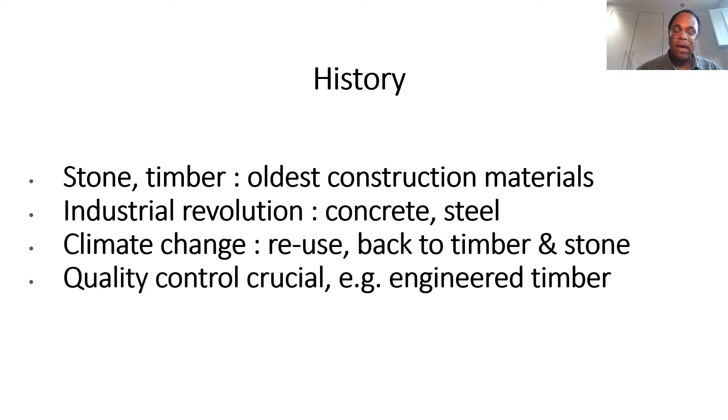Before I launch into the low carbon agenda itself, can I just say that, of course, structural engineers have a dual role in the fight against climate change.

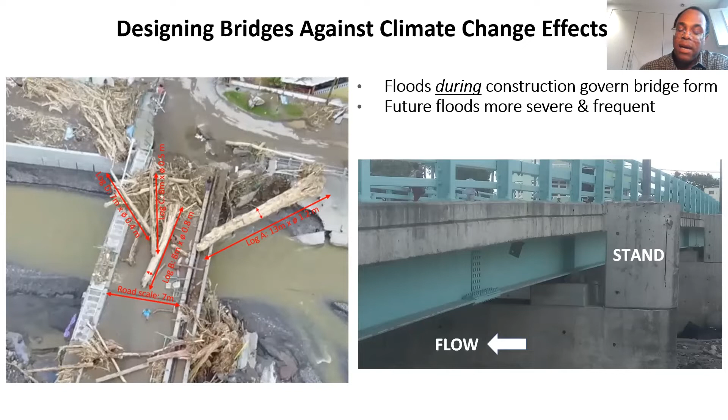The other thing we are finding is that it's not just the in-service stage which can determine what type of structure we use. Because the floods can often come during construction, anything like the use of props on the riverbed to support the weight of wet concrete during construction can be an unwise idea. So effectively using steel beams that are clear of the riverbed to support the weight of the wet concrete can actually be quite important. And therefore construction stage considerations with climate change involved can be governing the designs that you come up with.

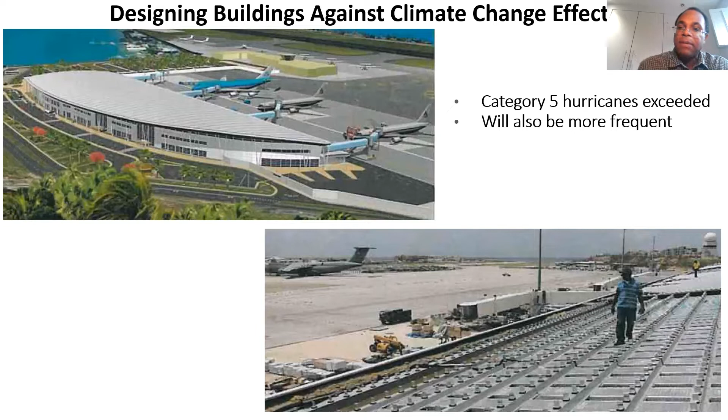Here is another example of something we've been looking at, which is basically airport roofs. This time we're not talking about floods, we're talking about hurricanes. And indeed the hurricane wind speeds and pressures are exceeding the category 5s which have been designed in the codes of practice. And so new forms of roofing, not just the cladding, but also the fastening of the cladding to the structure below, become quite important. And the definition of the tests that you need to make sure that the system of the cladding and the fasteners behave properly in hurricane winds. So representing the hurricane wind force effects very well in the test is an issue that becomes quite important.

Okay, so in terms of a decarbonizing strategy, the obvious thing is to go for low carbon materials. Quite often though, in many floor systems, walls, buildings, and so on, the most effective and most efficient structures tend to rely on combinations of the different materials. So you might find that quite often you're using a new low carbon material with an existing material, for example low carbon concrete with an existing steel. And because you're connecting the different materials, the connections themselves become as important as the components made out of the materials themselves.

As structural engineers, we have to make sure we understand not just the immediate, short-term response to load, but also the long-term behavior. What happens when, under its own self-weight, something's been sitting there for a while, you've got a lot of moisture, you've got a lot of change in temperature. Those are the sorts of things we need to be looking at. And bearing in mind that the construction industry is standards driven, we need to make sure that our understanding translates into design guidance.

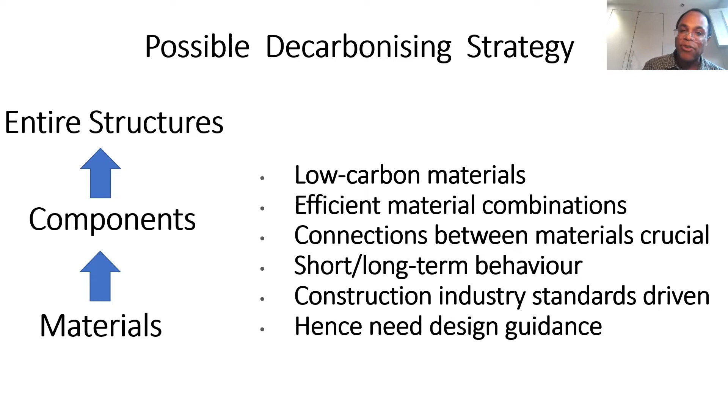So on the left side, I've deliberately put this image there because there's a multi-level, multi-stage process that we have to go through. We need to understand the materials. Then we need to understand the components made out of the materials. And then we need to understand the entire structures themselves. And to that end, an example of a project that we've been working on, which has been led by Mace and which is funded by Innovate UK, can be seen here in two key images.

On the left, you can see very clearly a two-story full-scale mock-up, which has been built by Mace at Brandon, about 2 hours drive north of London. In essence, what we've got here are these cassettes, these modules, which are 9 meters long, almost 3 meters wide, made out of cement-free concrete, which I think is supplied by DBG Holdings, connected to steel beams. And one of the key issues we've been looking at there is how can we create connections between the concrete slab and the steel beams that are reversible?

So exactly the idea that Julia is looking at: can we make these dismantleable, so that if we want to transfer them from one construction site to another, it shouldn't be difficult, but at the same time, the structural integrity of these components remains intact or remains at a very, very high level.

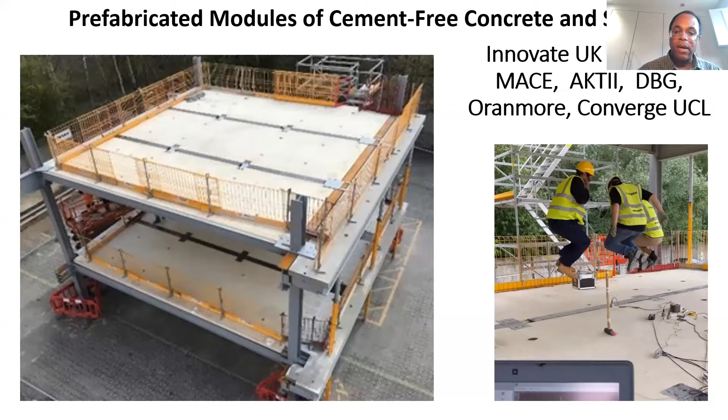So we don't have to do too much work to actually get them back into service again. And one of the things they were looking at here was how easy is it to construct? What can we improve on in terms of the connections, the details that hold the different bits of the assembly together? This is one very promising form of low carbon construction, which we are looking at with industrial partners.

By removing a lot of the concrete, you actually reduce the weight quite a lot. So it means your foundations, in theory, can be much less concrete intensive. The overall structure is cheaper. We're using less ordinary Portland cement. So it means that we can actually contribute to the decarbonization agenda.

And again, the whole idea of putting in connections that enable us to be able to separate these components again, if we need to, for whatever reason, in particular to reuse at another structure, is actually an important part of the research that's being conducted. And the whole idea of prefabrication actually enables that. There are various schemes, including precasting the slab units and leaving holes in them so we can put our connectors in, and equally we can take them out later on.

We've got to make sure, of course, that the connections remain robust. So if we do this a few times, the integrity of the connection between those different components doesn't drop. So understanding the long-term structural behavior of those reversible connections is quite important.

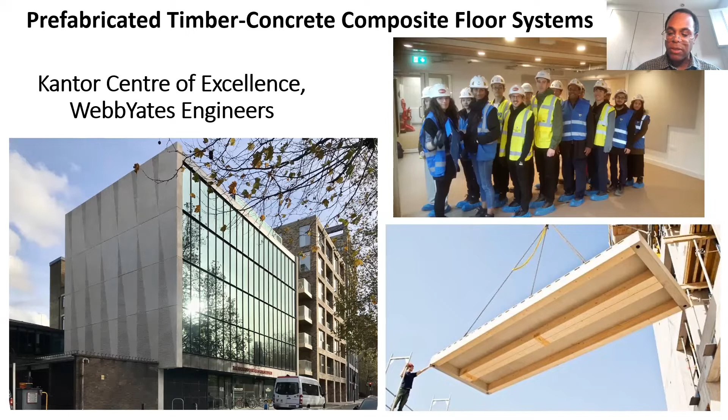On the top right-hand side, you will see evidence of the fact that I like to involve my MSc and PhD students. Here we are basically performing the same sort of human loading tests on one of the floors of this building, the timber concrete floors, before it was actually handed over to the clients. And I'm again pleased to say that the response was very good. I think between us, we weighed something like just over a ton. So we stood and then we jumped, compared the results, and those results were quite encouraging.

And one of the important differences between concrete and stone is that with concrete, the material starts life wet. So it basically means you can pour it into molds and put various shaped objects in there to facilitate what you want to do with the concrete, and in this case, to facilitate the implementation of the pre-stressing process. Stone, of course, is exactly the opposite. It comes already hardened, and therefore there are different challenges involved in actually implementing the pre-stressing process. So we cannot simply take the process which has been developed for concrete and transfer it to stone. We have to adapt the concrete pre-stressing process.

And that is one of the areas that we are addressing, alongside actually working out the detailed structural mechanics of these stone structures. Indeed, yet again here, one of the themes we've been trying to address is how can we make this reversible? There are certain schemes in which the best way to go about things is to actually glue the pre-stressing steel to the stone.

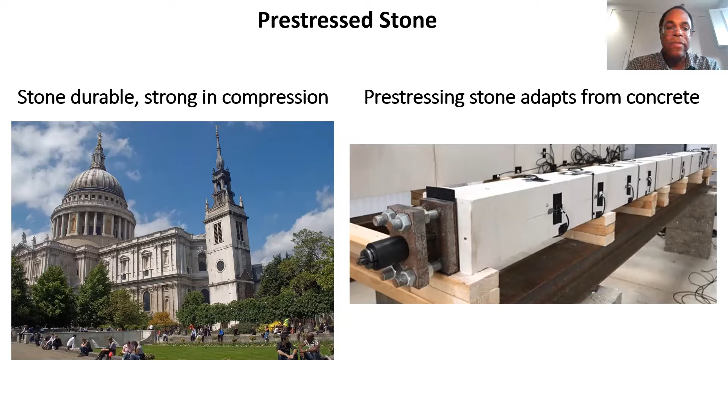The final example that I want to share with you is on the use of fiber polymer composites. These, of course, are materials in which you combine high-strength fibers, quite often carbon or glass, with resins. And the resins can be epoxy, vinyl ester, polyesters, and so on. The materials people have a very good handle on this. The properties you get, the mechanical properties, depend on which fibers, how much of the fibers, what directions you put the fibers in, as well as the type of resin that you use them with.

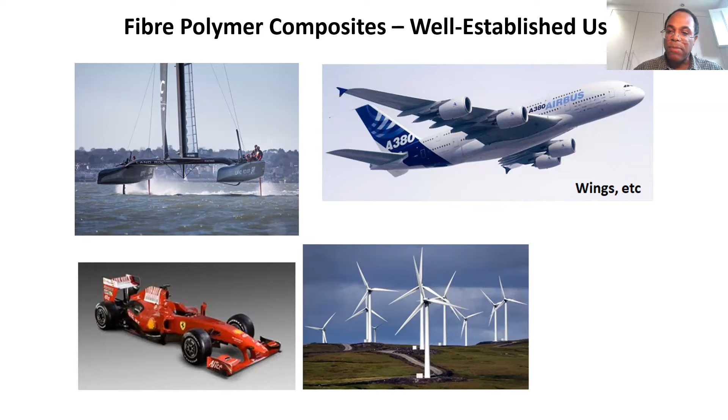And these materials have a very good track record in a spectrum of applications, some of which we can see here. So the renewable energy industry, the marine industry, the automotive industry, and indeed the aerospace people have been using these materials quite successfully for quite some time. And that basically has encouraged the civil engineering structures people to try to apply these materials in bridge applications.

So again, your foundations are cheap, but also because they can be prefabricated and they're very light, you can build them at a factory or assemble them at a different location, simply transport them to site and lift them into position over a very short possession period. So that means delays to traffic and the emissions you get from vehicles which are sitting in traffic are minimized considerably.

In addition, because these materials are meant to be quite durable, the idea is that hopefully during the life of the bridge, and in the UK, bridges are meant to have a life of up to 120 years. With composites, we're probably at the stage of about 50 or 60 years, which is still pretty good. But the idea is during that period in service, there should be minimal need to actually inspect them or maintain them. It doesn't mean it should be zero, but it should be minimal.

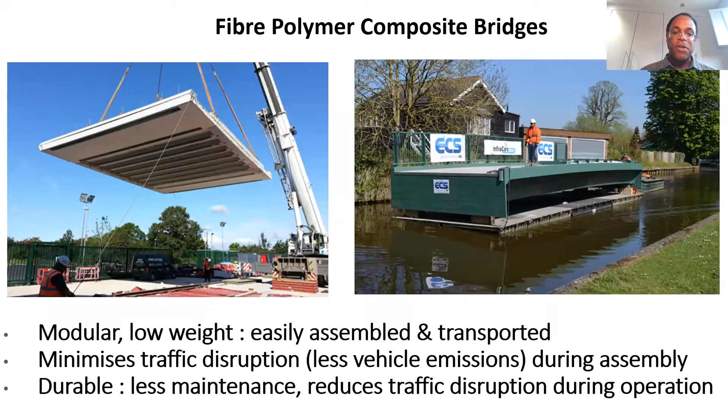And if this can be done very quickly, while retaining the high structural integrity of the overall assembly, then it means we've got a low carbon solution which inhibits, again, vehicle emissions while the structure is in service. So my last main slide here.

We've been working with industry, with National Highways, with county councils who own bridges made out of these fiber polymer composites to basically test them in situ. So alongside laboratory testing, I think that there is a role for field monitoring, especially given that sensors, which we can get remote measurements from, are actually cost effective. They're quite reliable, so the readings are repeatable, and they're quite durable.

So a lot of developmental work has gone into sensors for exposed applications, which basically means we ought to be able to sit at the offices and pick up a lot of data on how things are behaving, whether it's wet and icy or it's warm and humid.

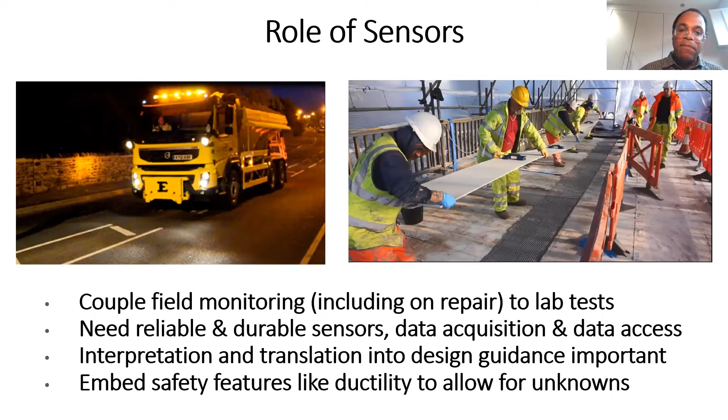So on that note, I hope I've given you a flavor of some of the different decarbonizing solutions that we've been looking at with industry. Watch this space. We'll be very keen to feed the results out into the wider industry and to continue to collaborate with academic colleagues, and to do that through networks, for example, the one that Julie has very nicely set up here. Thank you very much.